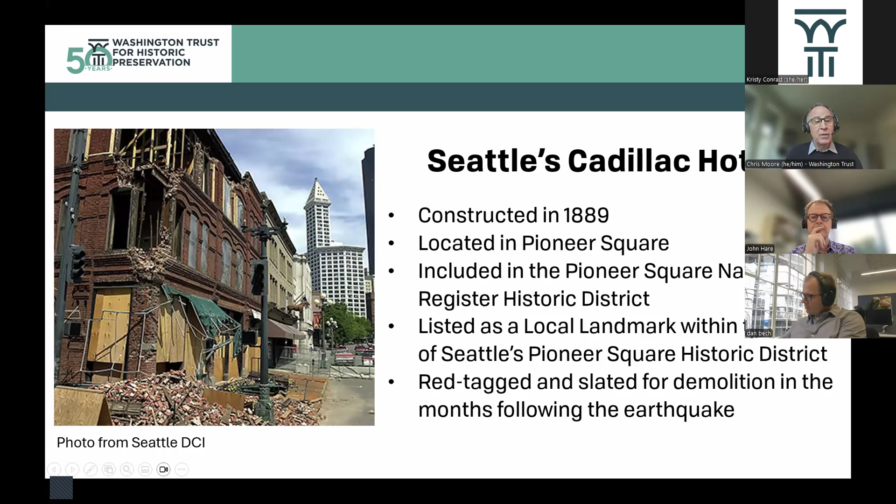So hopefully you all have been to the Klondike Gold Rush Museum, which officially opened in October 2005, following nearly 4 years of planning and rehab work to the Cadillac Hotel. And this shows, of course, that building in its post-rehab phase. So following the Nisqually quake, the community was clear on its desire to save the Cadillac Hotel, but the event also taught us about things we need, not just the things we want.

For sure, we need structural engineers. The Cadillac would not have been saved without the ingenuity of the many engineers who worked on this project, both local and folks from out of state. Next slide, Kristy. But we also need information as well.

And this leads to some of the more recent efforts to inventory and catalog URMs, or unreinforced masonry buildings, across the state. So in 2018, the Washington State Department of Archaeology and Historic Preservation, or DAHP, worked with our Department of Commerce to survey URMs. And the study identified nearly 4,500 suspected or possible URMs across the state. So what's helpful is that DAHP took this data and developed a URM dashboard.

And I do have to make the disclaimer that because of the survey methodology, the info on this map should not serve as a substitute for any site-specific investigations to confirm URM status of buildings included on the map. So it's a snapshot. It helps us understand where potential buildings are, but it shouldn't be used as confirmation that every site listed is a URM.

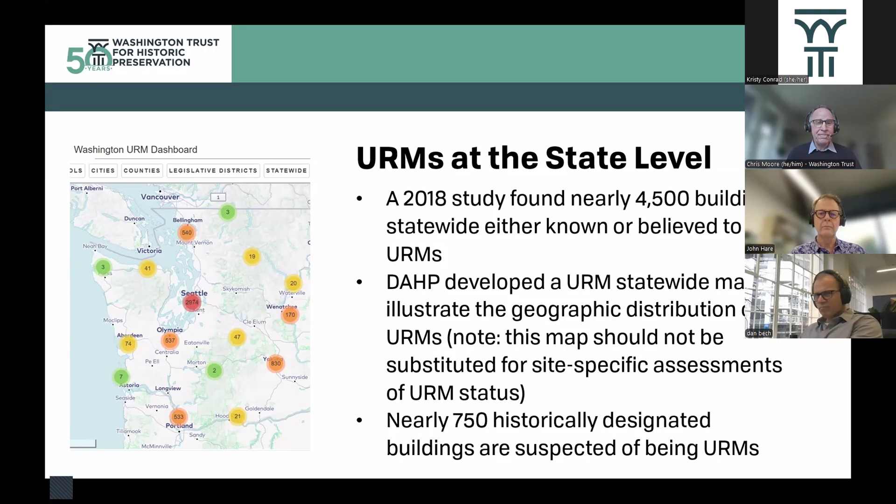Of course, we estimate that many more included on the map are actually eligible for historic designation because just about every URM is over 50 years old and therefore meets the age criteria. So next slide, please, Kristy. Now, of course, Seattle has one of the highest densities of URMs in the state and has been actively taking measures to address URMs for a number of years.

So between 2008 and 2009, there was a technical committee composed of structural engineers who developed proposed retrofit standards, something we really did not have for addressing URMs. In 2016, the city commissioned a report that found there were an estimated 1,160 URMs citywide. Now, a fair number of these have been retrofitted at least to some degree, if not entirely, but the study did conclude that 17% of that number are one-story commercial buildings that have not been retrofitted at all.

So it gives us some idea of the building types. These aren't all just 10-story buildings. They could be as modest as a one-story brick building. In 2024, the city, through the existing building code, adopted a voluntary pathway for URM retrofits that essentially can remove a building from the URM list. If you do X work, that building can then be, quote unquote, delisted as a URM.

And then a joint resolution that passed back in 2021 actually directed the development of a mandatory seismic retrofit program for URMs in Seattle. And the city does maintain a really good website that has all this information.

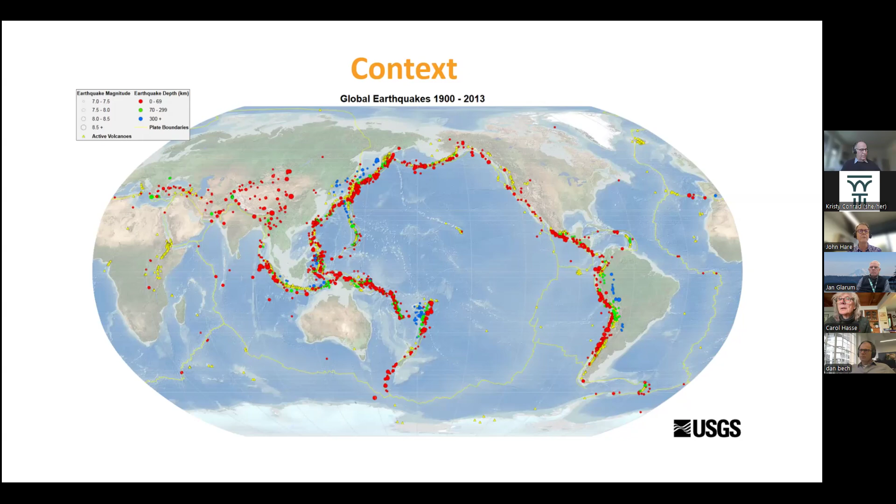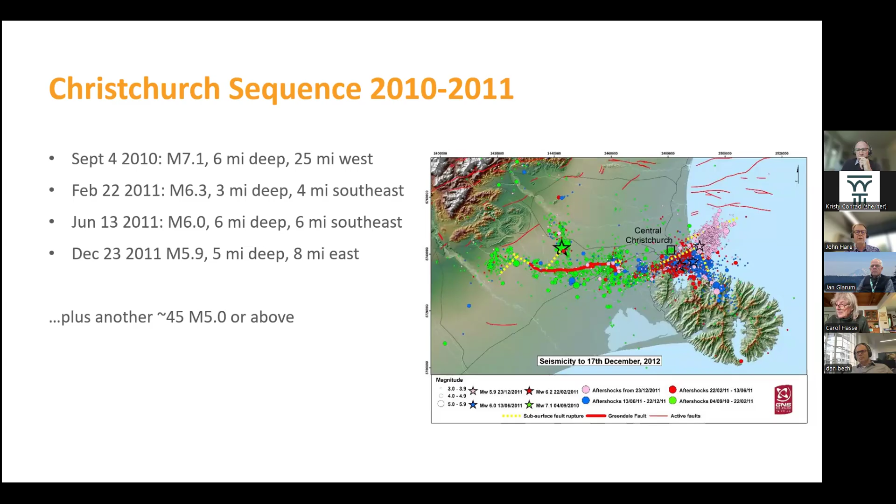And contextually, this is what you'd be a lot more familiar with than me, but looking back as we do on the Nisqually earthquake, that was a little further away, a little deeper, but still caused significant damage, as you saw. And of course, that relates also to another thing we have in common between Christchurch and Seattle, which is not great conditions underfoot. So the soils have a major impact on what happens through the events.

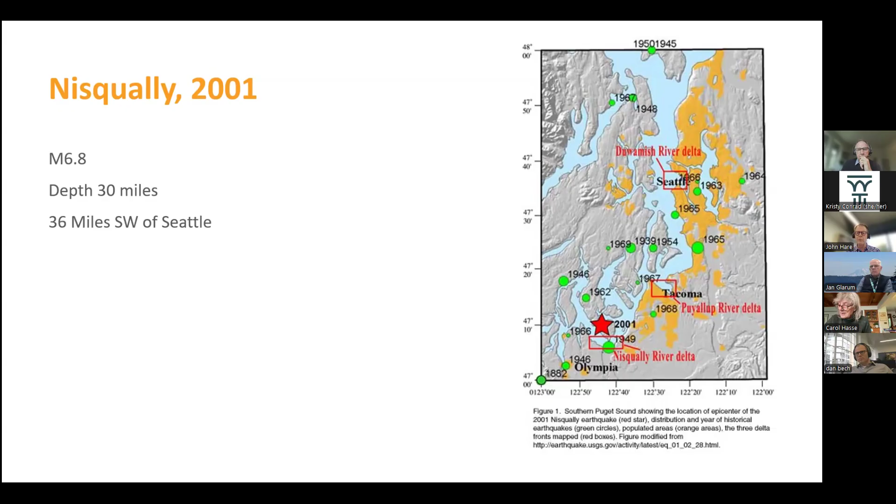Rolling forward and looking at a quick comparison of our two countries, New Zealand, population of 5 million, Washington State 8, similar scale. Christchurch, about half the size of Seattle. What I thought was really interesting when I put this together is that the non-Indigenous settlement of our different zones was about the same time. In the case of Seattle, it was backed by lumber and gold. In the case of Christchurch, it was agriculture, but very much a case of settlements happened at the same time. And actually, a lot of our architecture, I think, dates back to the same period because we both had early formative experiences which set our cities up to be what they are.

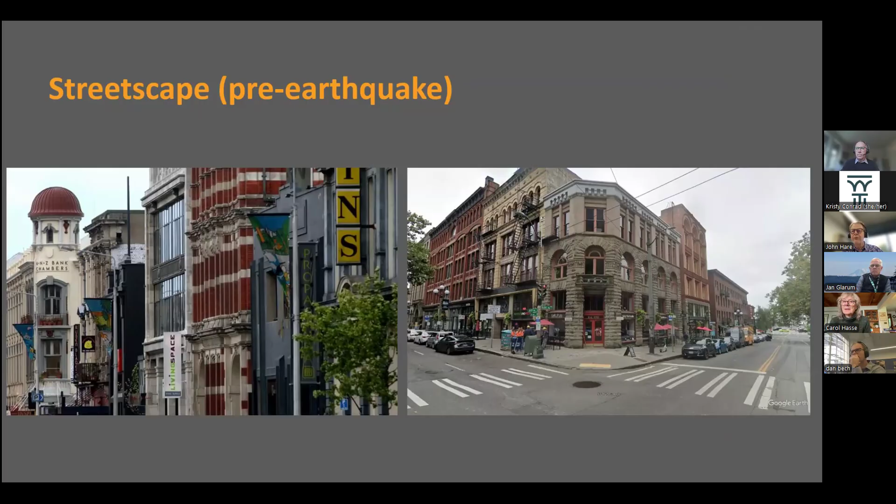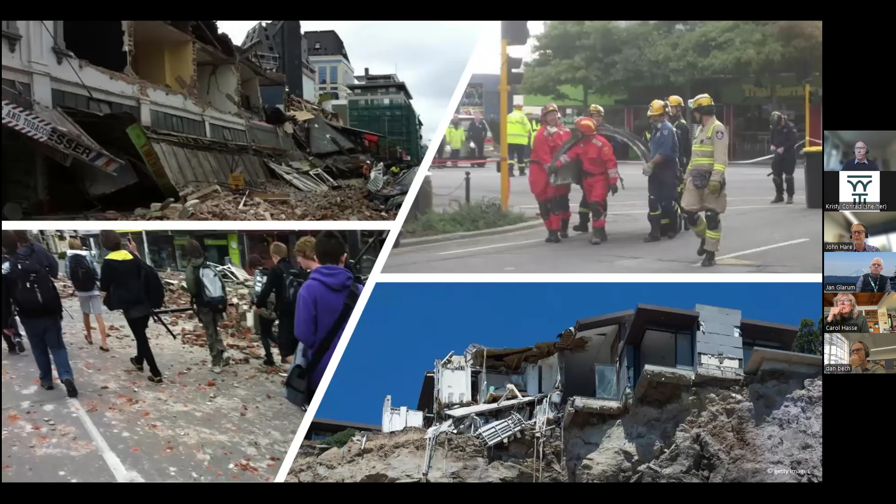Lots of rubble in the street, fallen facades, fallen masonry. In the bottom right there, buildings hanging off the side of cliffs which had collapsed, and the urban search and rescue teams pouring into the city to help recover. It was a significant recovery effort, and we had teams from all over the world come in to help.

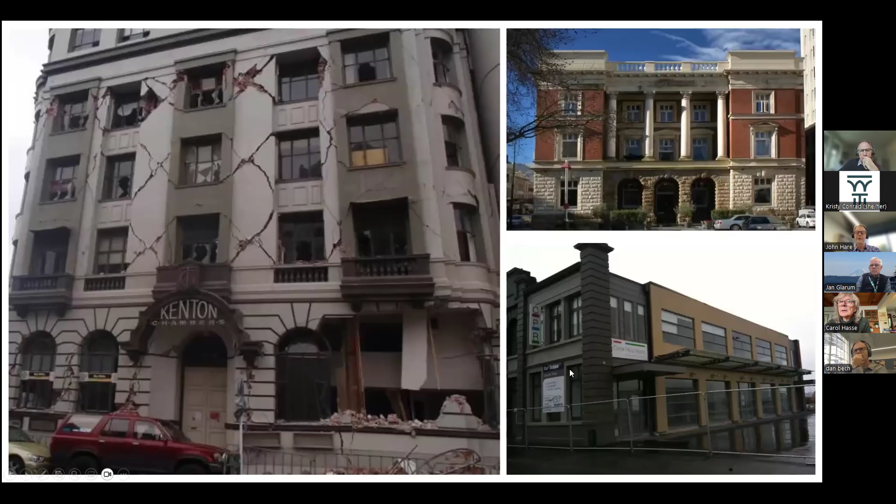Oops, that wasn't the right thing. Moving on, so I'll just go back a step because we seem to have gotten out of sequence there.

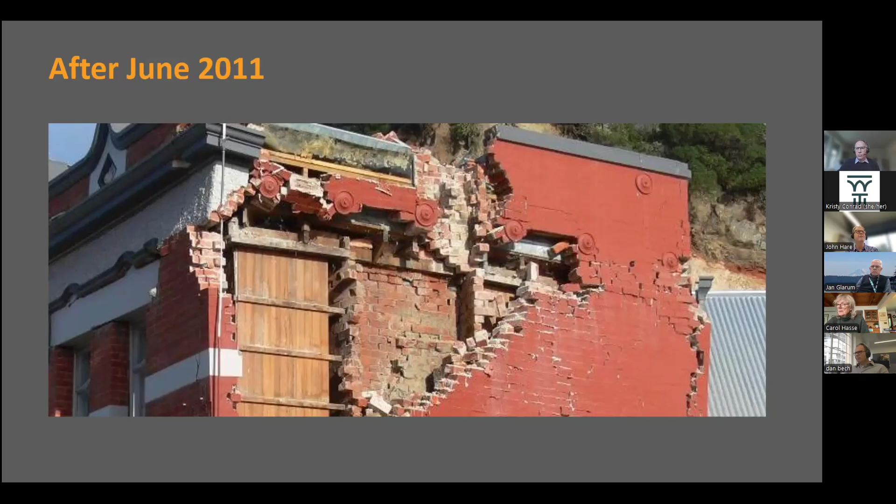The larger buildings, even ones with a reasonably substantial structure behind them, as you see on the left, are also fundamentally damaged. Another building we've lost. But on the right, I'm happy to say we also had some success stories. Those are two buildings which I will come back to later, buildings which, even after such a major event, came through looking in pretty good shape. I can't tell you exactly when those photos were taken, but certainly post-quake, and not necessarily that long post-quake.

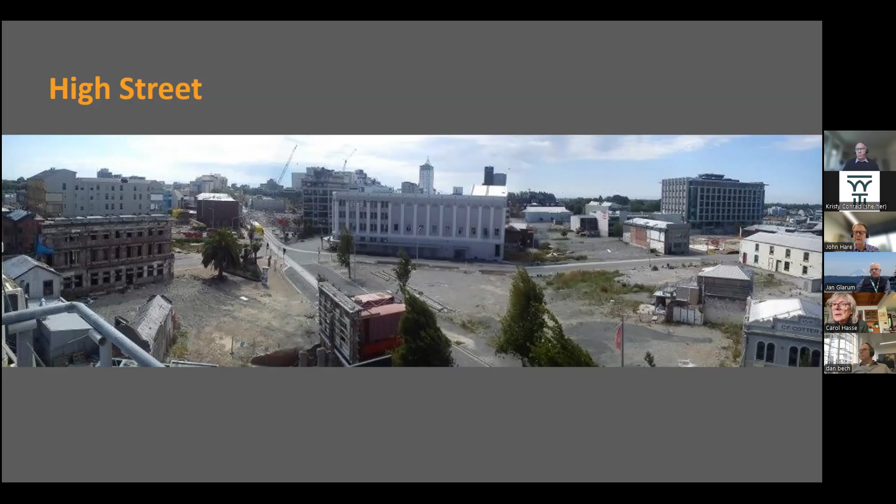There are a lot of reasons for that, which exclude just the fact that the buildings were badly damaged, which I won't go into, but insurance had a major part to play in this. Certainly the city was fundamentally changed by those events. It wasn't just about the buildings.

Which I think is the key question here. Well, as I said, it's not all bad news. There was also some good news. Some of the interventions that have been tried before the earthquake certainly had an important impact.

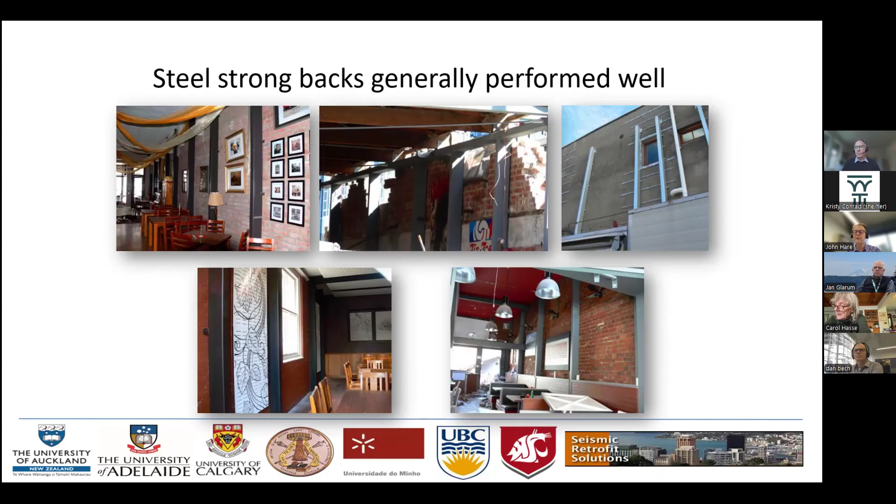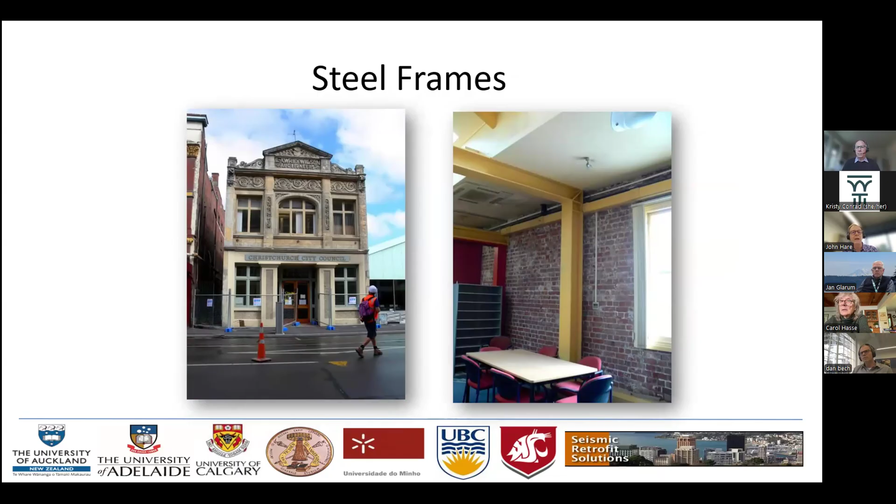Steel frames inserted in buildings - that cute little building in the picture had been retrofitted about 10 years before the earthquake, I think. And what I would have thought was some fairly spindly steel frames actually did a pretty good job for that particular building. Unhappily, they still haven't found a use for it, but happily it is still there.

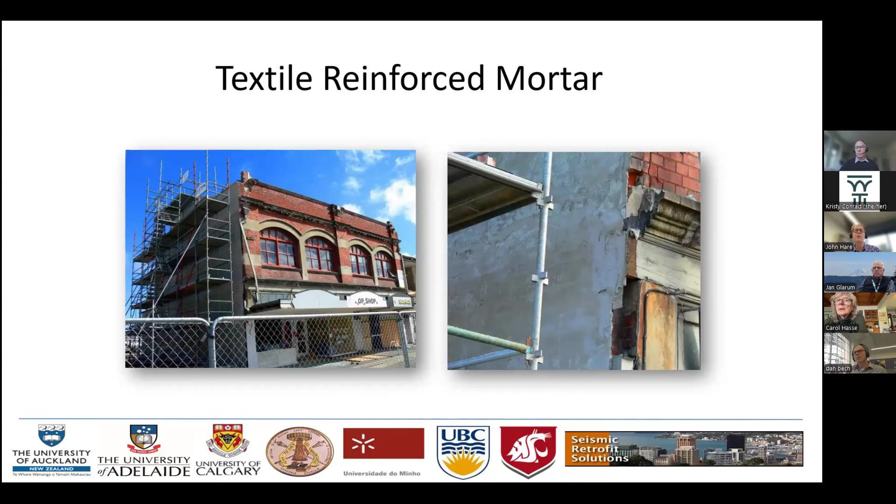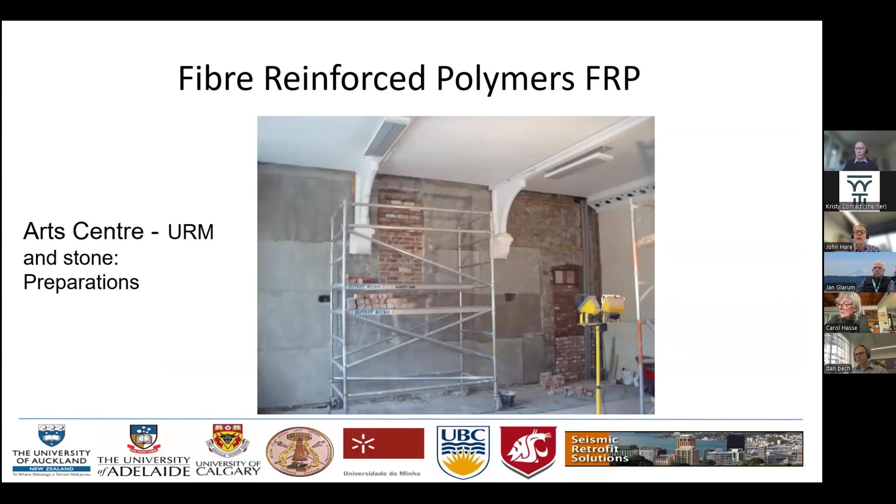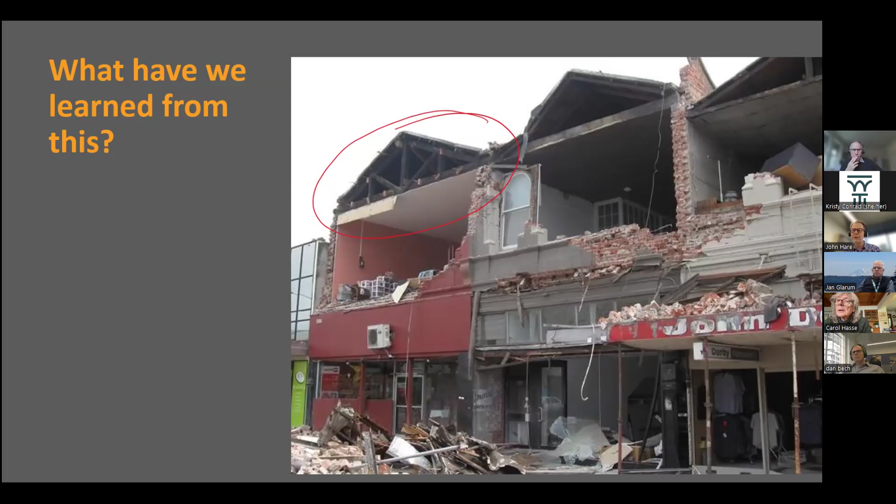And that's because possibly they had an engineer there to tell them that if the load is only so much, then you only need to put in so many ties - a good example of where engineering is perhaps not helping as much as it might have. So the real message there is if you're not going to do enough, you might as well do nothing. But if you can do enough, you can save something, even when the demand it might have been designed for is a hell of a lot more than you thought.

It's not really about the numbers. It's about making sure there's a basic, simple load path so that when the element you need to secure, in this case the facade or the parapet, is being shaken, there is something there to tie it back to the roof. Even if the roof is not the strongest in the world, it will make a big difference.

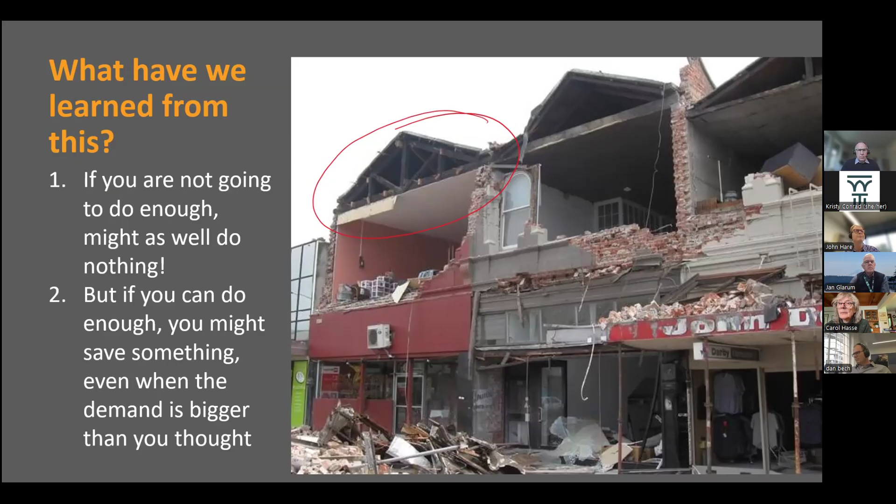To show you how much difference I think this can make, I've got an example which is maybe not the most obvious one, but to me it's sort of the poster child of how this can work. This is a building which I think of as Smith's Bookshop.

Smith's was a well-known second-hand bookshop in Christchurch, pre-earthquake. It's now relocated, but it used to be in this building. The picture on the right is from Google Earth, and there's that L-shaped building in the middle. Smith's Bookshop was one of the tenancies in there, I think probably number 131.

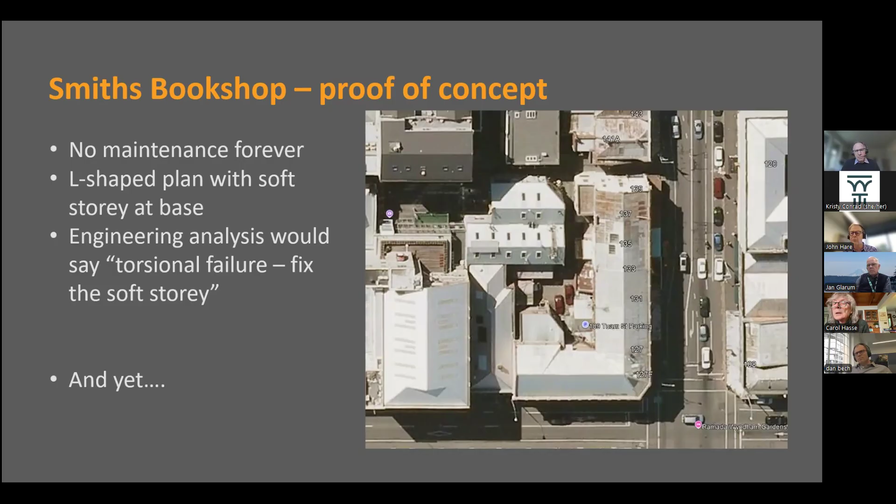But this building had everything wrong with it. If you ask an engineer what the worst configuration of a building is, they'll say it's an L-shaped building, and this is an L-shaped building. It's unreinforced masonry, or it was. What you can't see is that all of the street frontage, all the way around both sides of the L, was open.

We knew this building quite well because we had been working with the local Heritage Association to try to get all the owners of each of these different units to tie these buildings together and do a collective strengthening scheme, which would have been great.

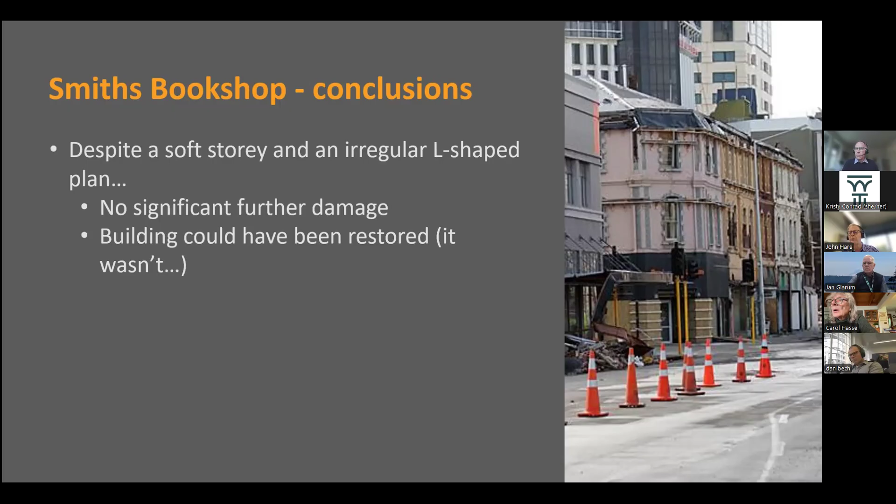That facade is the same as the facade down the left. Despite the soft story, despite the irregular L-shaped plan, there was no significant further damage, and the building could have been restored from this condition. Unfortunately, it wasn't.

And that teaches us exactly what I've been saying: you can do a lot with a few simple interventions. They don't need to cost a lot, because it's just those ties. It doesn't even need a whole lot of engineering.

In fact, if we let the engineers loose on this, they'd have wanted to put frames in at the ground floor to prevent that soft story failure. But the reality is the thing that makes the biggest difference is the ties that hold the walls back to the floors and the roof. Without even strengthening the floors or the roof, you get a lot of benefit right away. I really want to emphasize that point a lot.

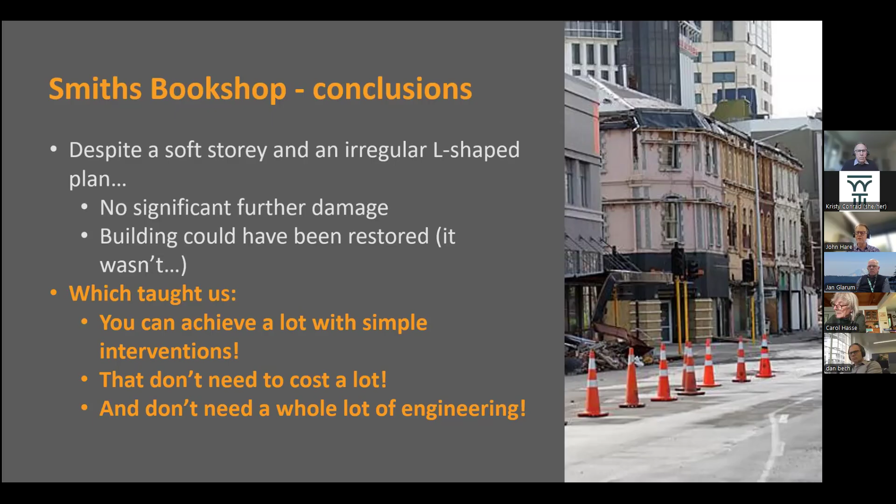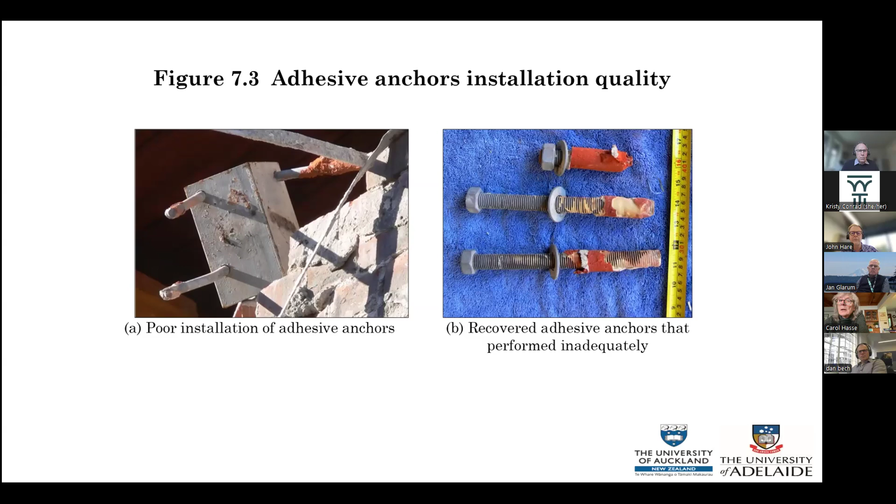And so, what do you need to do? Well, muzzle your engineers. Don't let them over-engineer the solutions. Get those simple, cheap interventions done as quickly as you can. Get the basics right. And make sure you invest in those third-party inspections, so that you get the basics done well. So once again, it's not about the engineering.

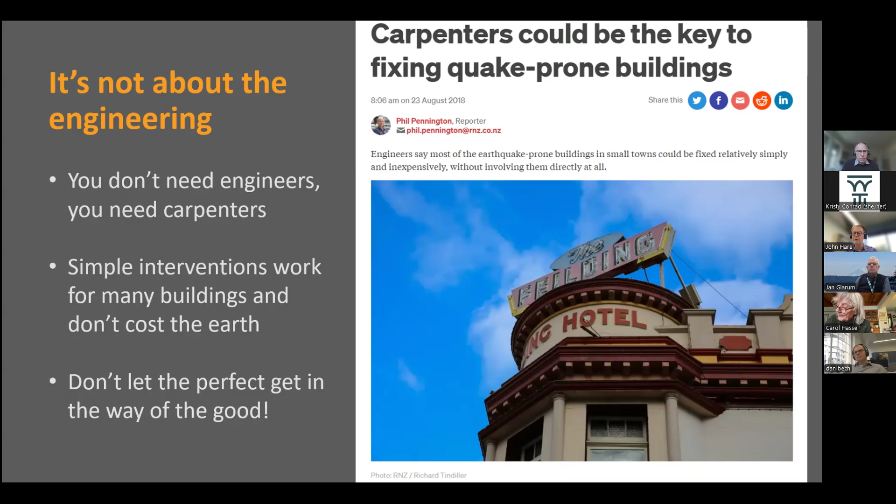So once again, I'll say it, simple interventions work, don't cost a lot, and need to be done. And for the sake of that other engineering, which we might get to in time, I'd say don't let the perfect get in the way of the good. If we wait until we have the money to pay for the major interventions, we'll miss the opportunity to do the minor stuff, which makes the most difference. So now I'd like to change pace a little bit and go to some case studies, which I think will help illustrate that point further.

This is a very well-known complex of buildings in Christchurch. If any of you have been there, I hope you've visited the Art Centre. It's a wonderful set of neo-Gothic buildings. Not quite the brick buildings and not quite typical of the sorts of things that we'll see on the main streets of all our towns, but nevertheless an important set of buildings. And if you look at a site plan, I think there's 18 or 20 buildings there. I never remember the number, but lots and lots of buildings built over a long period of time from about the 1880s forward to the early part of the 1900s. And most of them, like the picture I just showed you, beautiful old Gothic stone buildings of about 2 to 3 stories.

It used to be the university back in the early days. The university moved out because they ran out of space at some point. And eventually it passed over into public ownership. There was no initial purpose to it. And once it was passed over into that trustee ownership, it became the Art Centre as we know it today. We were involved from the early days in that, before I even joined Holmes. So it's a very, very long period of time, since 1980.

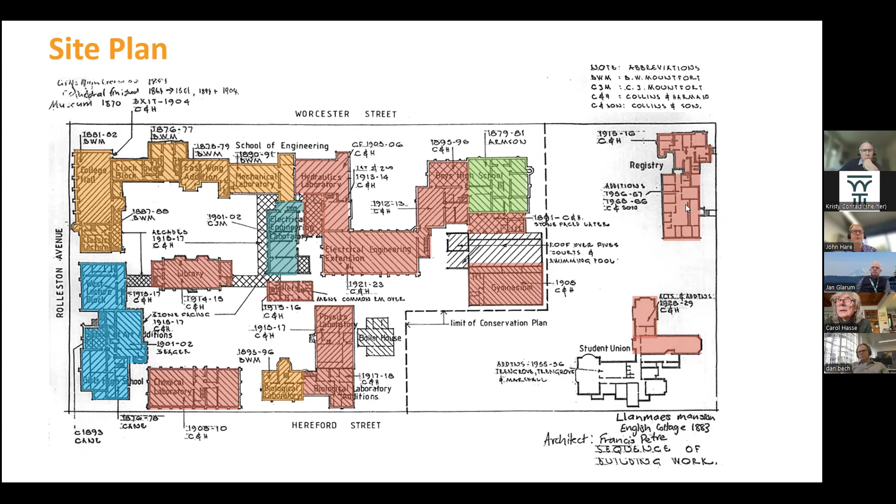And from those early days, we started out on what we called a 3-stage process. The first stage was basic securing, exactly what I just described to you. That was followed through to stage 2 of fixing up the bits and pieces, the finials, the crest, the mullions, the other elements of the facade, which were the heritage elements, but the ones which weren't going to cause a significant life safety risk. And finally, we'd go on to fully strengthen the buildings if and when we had the money to do so. These are some early documents I found recently. And looking back, you'll see there's some numbers, not very big numbers.

And that was the costs as they were being measured on the way through to do that work to these buildings. Now, these are obviously 1982 dollars, which are a little different value now. But essentially, the message was not a lot of money had to be spent. One or the other of our Holmes engineers would walk through the site on the way to work in the mornings, point their arms to various things and let someone get on with it.

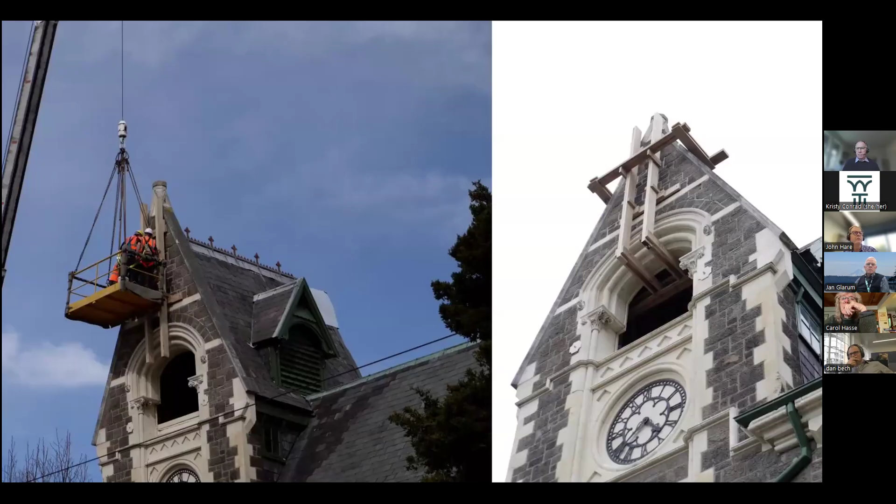Now, we did find evidence of damage and movement, and so we did make the effort to get around there and do a lot of work. So you can see up on the left, people putting timber walers on or mullions on the outside of the building. You can see on the right, and this was the work on the inside that we were tying that back to.

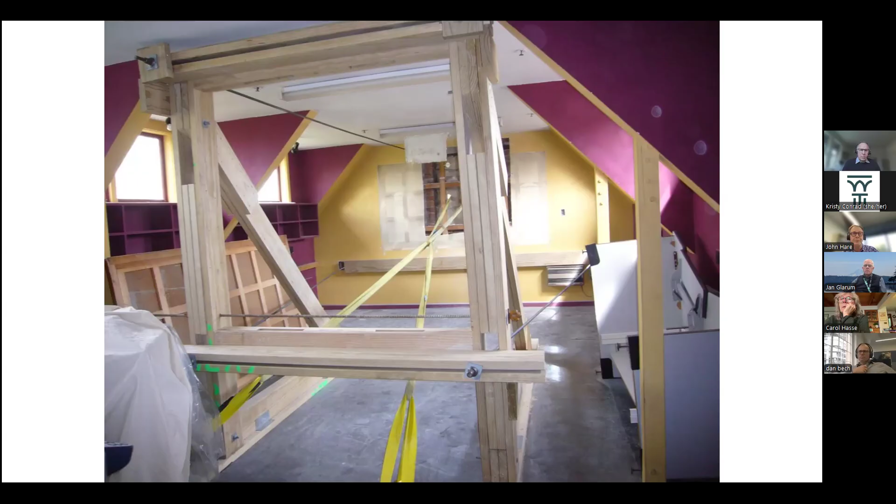I said the other day, I think some of the most useful work I did as an engineer was probably to be on the hammer and the saw trying to help do this stuff. We were moving quickly to try and get things done. And that turret I showed you a few minutes ago, we figured in the end that for its own safety, we better pull it off the building. And it was fortunate that we did.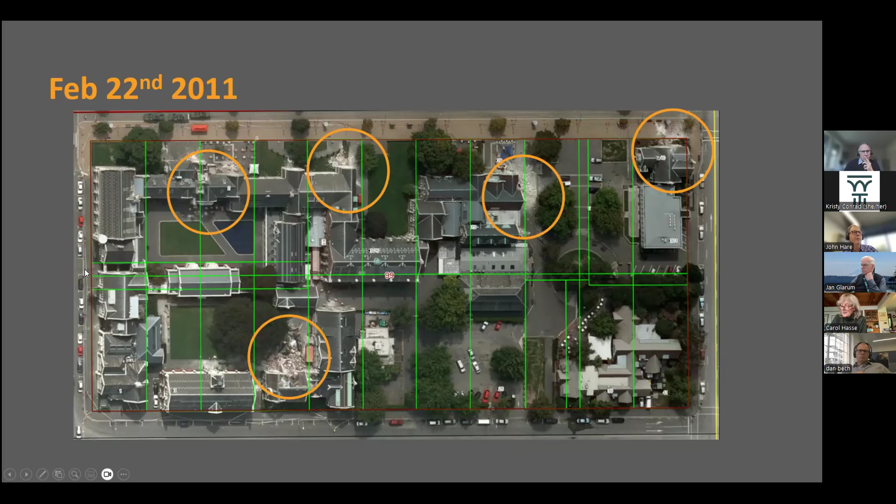But otherwise, we lost some gables, we lost some of the finials, some of the crest and adornment. The tower I showed you a minute ago was on the left-hand side. You can see the cap there, but it was perfectly safe. It would have otherwise gone through the roof of one of the most important buildings. And looking around the site, yep, there was damage, but it was savable. And so for the sake of that $1.35 million worth of expenditure, we managed to save probably one of the most important historic precincts in Christchurch.

Changing scale a little bit, this is the old government buildings, which we did strengthening work on back in the 90s. I won't spend so much time here because it doesn't illustrate the point so well, but once again, one of those buildings, it fell into disuse, was bought by the city and strengthened at the time for 3.1 million. It was in dreadful condition, as you can see there, held together by a few bits of string, basically, and a very, very heavy unreinforced masonry floor plan.

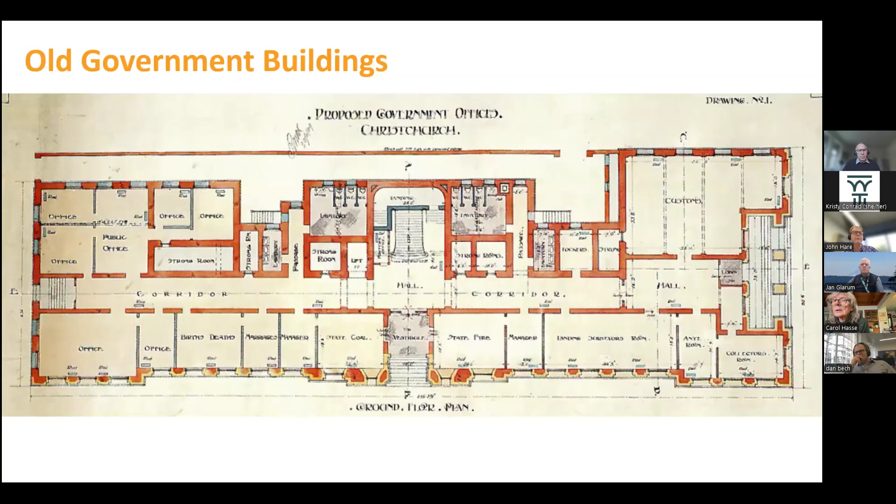We broke out bits of that and put in some reinforced concrete cores, which are those red areas there, and a little bit of concrete round. But we were able to save the heritage by really focusing the strengthening in the back of the building. And the net outcome of that was that we really saved an awful lot of the building, and it really took what would otherwise have been potentially demolition, but certainly major repairs, back to something relatively manageable. It says there the cost of repairs was 11.3 million, but the 32 million equivalent new building would not have been a beautiful heritage building such as we've got there. It would have been basic accommodation.

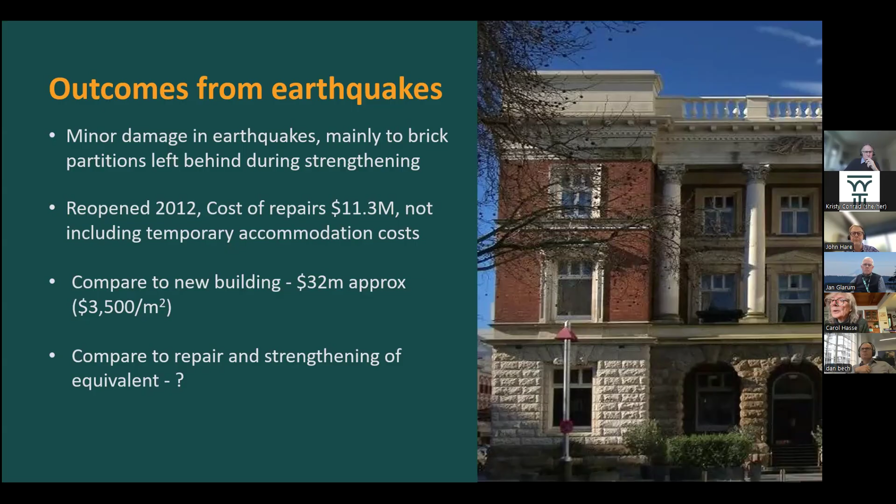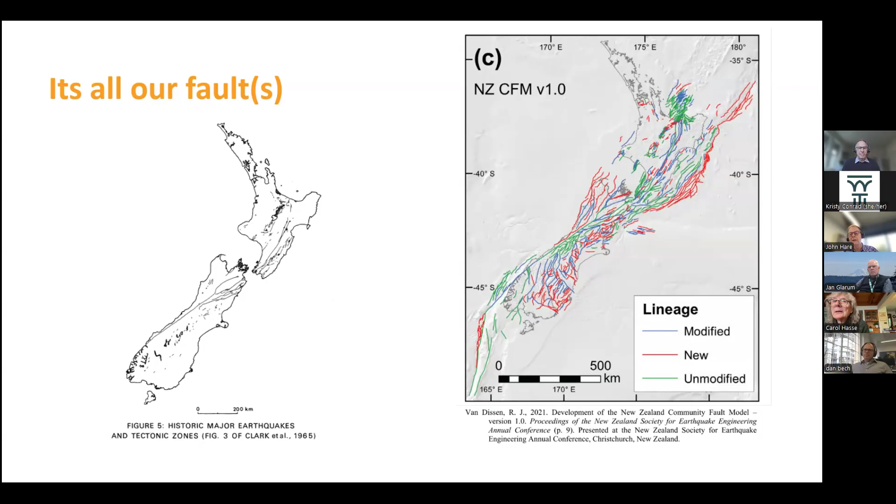It's important we understand the risk, but the reality is we're in a situation, both Seattle, Washington State, and New Zealand, where there are lots of faults out there. And I would say most earthquakes happen on faults that weren't previously known about. And this is where I come to the only equation, the only piece of engineering equation I'll put in here, which is as simple as the probability of an earthquake is about 1. They're going to happen, it's inevitable. And if you go back to that fault map, the only question we don't know is really, when are they going to happen?

But you could look at that fault map and say it's just like that. It's a load of alarm clocks. They're all ticking, waiting to go off. Now that sounds a bit fatalistic. To an extent it is. But I think that's where you get to the important point, which I'm always going to come back to again. The clock's always ticking, but that simple basic securing, which I'll keep hammering, is what makes the most difference for relatively little cost. It can be affordable and it can be done.

You don't want to let the engineering overtake the budget. If we start talking about doing too much work to make the buildings too good, then we won't be able to afford it. Whereas if we do those little things quickly, then we'll have a much better outcome. And remember, smaller earthquakes happen more frequently than large ones. And so those are the ones that actually really form a great proportion of the seismic risk that we face in our cities and towns day by day.

And finally, that point, which I know it's very hard for us to deal with as engineers, we don't get much say with it, nor as building owners, but really you've got to work with the regulators to make sure you can afford what you're planning to do before you start to regulate to do it. Otherwise, you'll end up in a situation where you can't afford to do it and you kick the can down the road.